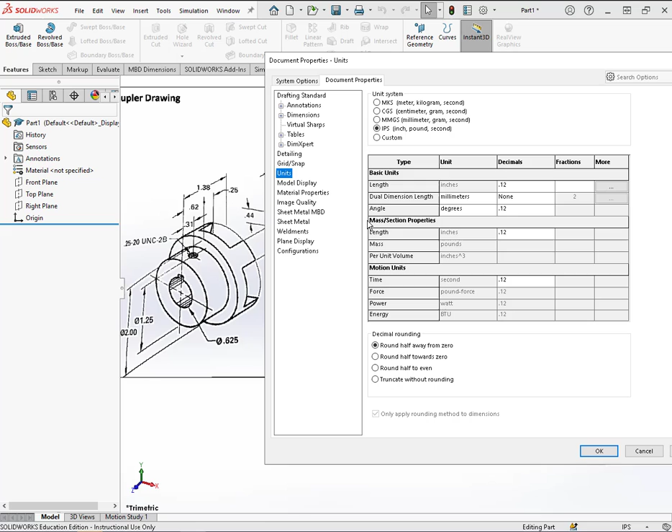So the rule of thumb is whatever tolerance value you hold is how many decimal places that you should have. So we're going to go ahead and change that to 3 decimal places. So inch pound second, and then the number of decimals is going to be 3. So we're going to go ahead and change that. Angle, we'll just leave it. You're probably not going to go lower than that on the angle, and then the mass, we'll leave it as well. So the length, which is a distance dimension, we want 3 decimal place precision. So we're going to hit OK and get out of that. And now we're going to start drawing.

So let's kind of zoom in here. Probably the best part to start on, the easiest part, is the one in the middle here, this middle bracket that goes in between the couplings. And actually, this would be made of rubber, and then the couplings themselves were a steel alloy. So how would we make this? Remember when we talked about design intent, that was our plan that we were going to map out before we go, so we know exactly what steps we need to create. So we're looking at this, we're given diameter, so we know that this is a circular cylinder here in the middle. And then the outer diameter is also circular.

And then we've got these edges that look almost like a gear. So what we're going to do there is just an extrude. We could do just an extrude with this smaller inside diameter, and then create one of these teeth. If we are calling this a gear-like object, we'll create one of these teeth and we'll extrude it, and then we can do a polar array to copy those. So that's probably going to be the easiest thing, rather than try to create all of that geometry in one sketch.

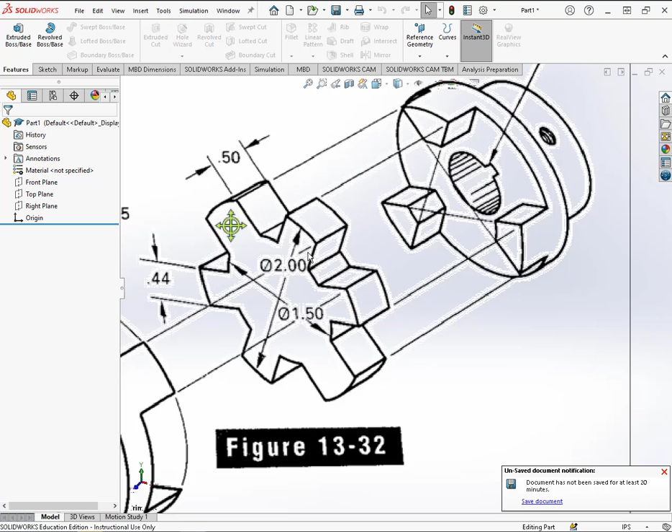So we're going to start on the front view, because if I zoom out a little more and have my front plane facing, that is the way it's going to be facing when we put this assembly together. So we're going to start on the front plane. Again, that's part of our design intent. We want the end product to look as if it was going to be assembled together. So we're going to click on the front plane. We'll go ahead and start a sketch.

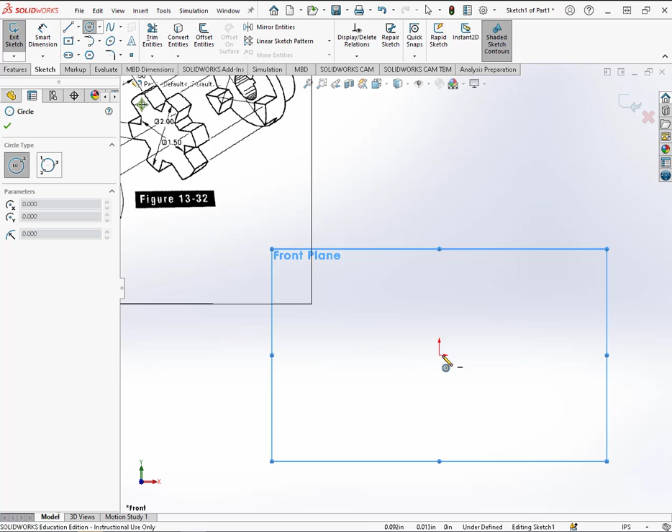And our sketch is going to be, like we said before, we're just going to do this small inside diameter, so that 1.5 diameter, and that's basically just going to be a circle. So we're going to start at the origin, because that's good design intent, and everything is symmetrical and it's going to line up. So we're going to create that, and we're going to put a smart dimension on it of 1.5. All right, and once you have it dimensioned, you can see that your sketch is fully defined.

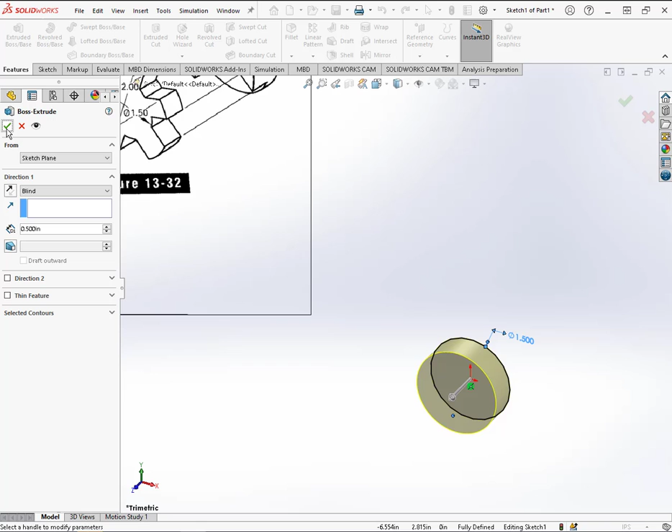We can go ahead and check out the sketch, or we can skip that click and go straight to features and go to extrude. Now, what is my extrude distance? If we look up here, it's going to be 0.5. So we're going to type in 0.5. We don't have to change anything about the end condition because it's already on blind. And we'll check it off. So now we're going to check out of the extrude, and we're going to go ahead and create the teeth parts.

So if we look at this, we're not really given any dimensions except for the width, but we can kind of justify our dimensions based on what we know of this object. So we know that this fits together. There's 3 prongs on this side, 3 prongs on this side. Those 3 prongs are going to fit in the slots here. So if we do 3 into 360, which 360 is how many degrees is in a circle, we're going to divide that by 3 because we have equal pieces. That's 120 degrees apart. So each one of these prongs are 120 degrees.

And then if we look at the other coupling, those will also be 120 degrees apart, but they'll be offset to fit in every other slot. So this one is actually, if we were to draw a quadrant line straight up from the center of that hole, this one would actually split that quadrant. So we can kind of figure out what angle this should be at. And then we also have the distance here. So we have everything that we need to know. Okay? So basically, we're just going to add this geometry and then we'll array it.

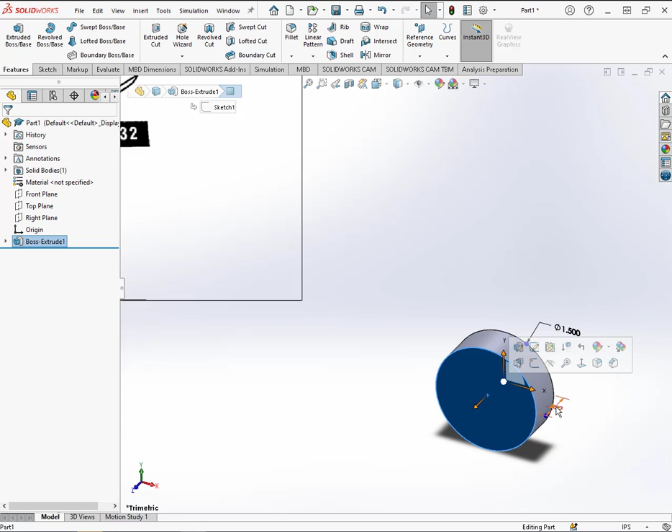So we know it's 0.44, a distance of 0.44. And we also know our angle here, assuming that it's going to be the same. It looks like these are at a diagonal, so it keeps that same angle all the way across. So to create this, we can either start back on the front plane, or we could choose this surface. Either way, it's not going to matter a whole lot. So just choose that front surface, and we're going to choose sketch to create a sketch on that surface.

Now, because this is offset in our assembly, doesn't mean that we can't make this one straight up and down from our origin. Because in our assembly, we can rotate that to match. So for us, we're just going to make a center line straight up, even though in this pictorial, it looks like it's offset by the angle. So our first step, once we're in a sketch, is to go up here and choose center line. And we're going to start on that origin and just make our center line straight up. And we want to make sure that it is vertical. So that yellow constraint that we see, that geometric relation that pops up, tells us that we are indeed at 90 degrees.

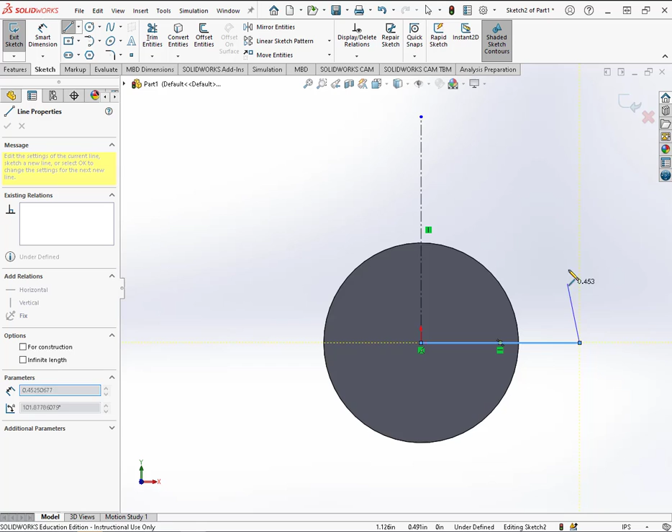So center line, if we look at this again, if you do the down arrow next to the line command, you're going to click on center line. Now, if you accidentally just choose line and don't choose center line, then you can create a line. Let's say I created that line, I can make it for construction if I need to. So we can make any geometry turn into a center line if we need to. I don't really need that right now, so I'm just going to delete it.

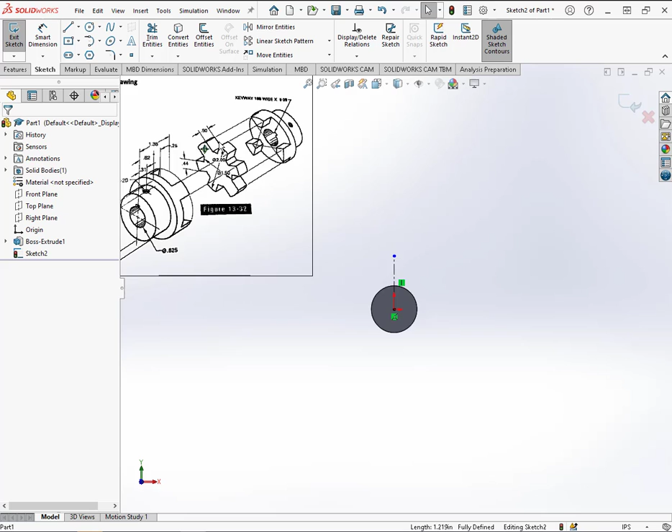This center line, we're not going to put at any certain length, not for now. We'll go back and create some of this other geometry, and then we can figure out what we want to do with it. But for now, just make it straight up and just make sure it's vertical and it's anchored to the origin. So if we look at this, that outside diameter is 2 inches. So our next step would be to create a circle that has a diameter of 2 inches.

So that's what we're going to do, and it's a concentric circle, meaning it shares the same center. So we can start that from the origin and just create it out. Remember, we don't have to type in any distances there at the front end of it, but we do have to go back and put a smart dimension on it.

When you click on the circle to start, see this little orange dot that comes up? That tells you that you're concentric. And you can also see that little symbol out beside my arrow. That tells me I'm right on it as well. And you're going to have this concentric mate pop up too in your sketch. So those 3 things are going to help me know that I'm right on the origin.

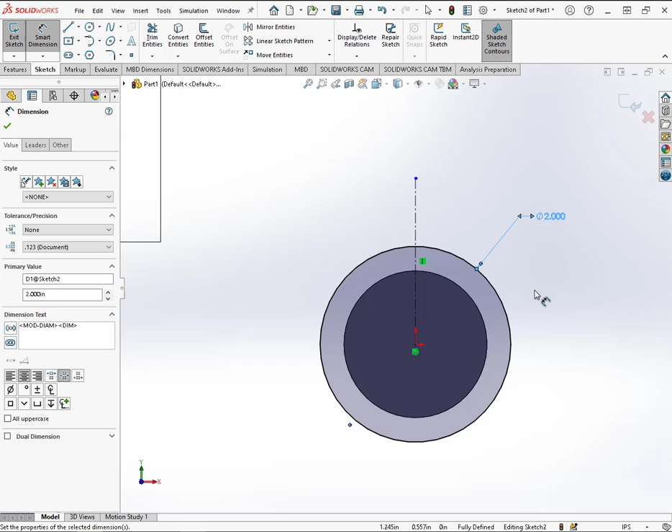So putting on that dimension, it's going to be a 2. And now if we just look back at this object, we know that it is 0.44, and that's going to be centered up around our center line. So we're going to offset 0.22 on each side. So I need to get out of Smart Dimension. 2 or 3 ways I can do that. I can hit Escape, I can come and unselect it up here, or I could right-click and choose Select to get out of the command.

So Offset Entities is here. We're going to click on that offset. We're going to choose our center line, and then we're going to choose bidirectional because we want the same distance on both sides, and that distance is going to be 0.22. And we will add dimensions. Select chain doesn't really matter because we only have one entity anyway. And you should see your lines showing up on either side, and we're going to check that off.

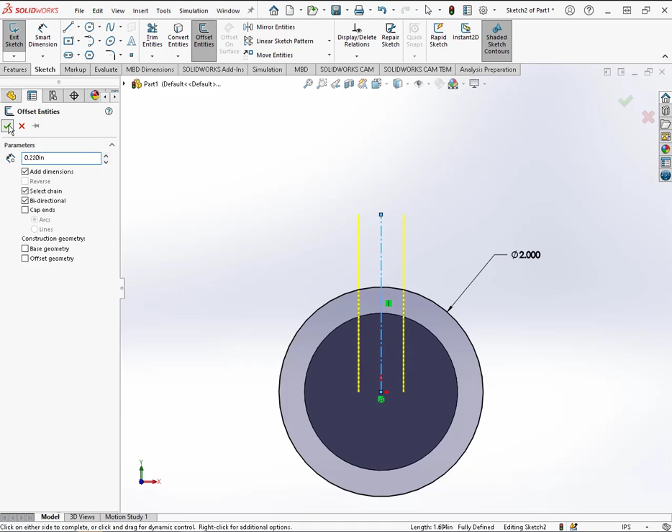So when we check it off, we can tell that it did what it's supposed to do, and we can see that there is a dimension on there that allows us to know that we are correct. So what's showing up here is the geometric constraint that we put on it. It tells you that this line is in relation to your center line because we offset it. And if you just hover over it with your mouse, you can see that it's an offset line, and it tells you which lines are offset.

And then this one was our vertical line that when we created that center line and told it to be straight up from the origin, that just tells us that it is straight up and it's at 90 degrees. So what we're looking at here, we do have all the geometry, but we don't really need this line. We could actually trim the center line right here so it'll come to the edge of the circle. And we can trim out here. We don't need the rest of that circle.

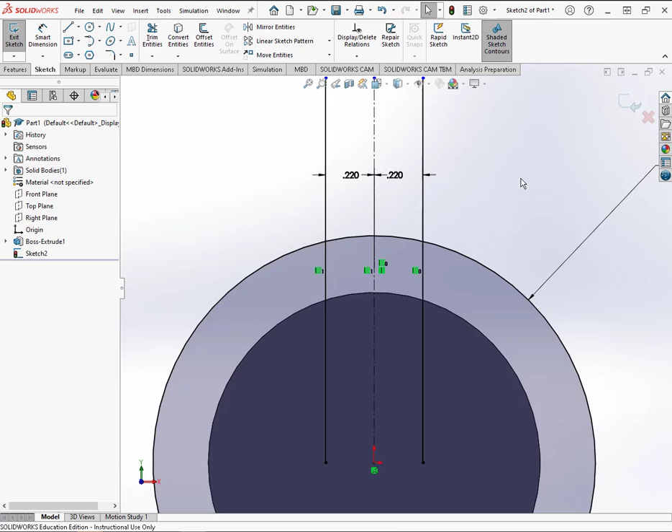So in order to finish this drawing, right now it says we're fully defined, but we really need to trim up. We want a closed loop shape for our sketch. In order to get a closed loop, we still have to make this line. So even though we have geometry already made and it looks like there's a line there, if we rotate, there's not really a line there.

But we can easily bring this edge. If you click on this edge and go to Convert Entities, it's going to convert that edge to our sketch. So now if I go back to normal to, this edge is already in there. Okay, so we can see that we have a closed loop if we come in and trim out where we need to. So the last step for this sketch is going to be trim entities.

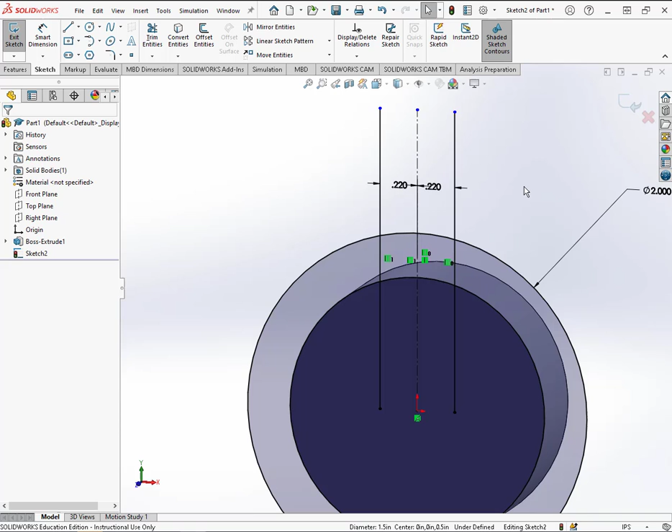Now, SolidWorks has several different trim options. If you're an AutoCAD user and you're coming into SolidWorks, the trim to closest is probably the most similar to AutoCAD, but Power Trim is definitely going to be your best option most of the time when you get used to it. Now, Power Trim, the way it works is it's almost like you're drawing a line. So out here in space, I'm taking my mouse and I'm holding down my left mouse button.

So your main mouse button, and it looks like you're drawing a line. But anything that that line goes through is going to trim. So if I put it through here, it's going to trim, and it's going to trim automatically up to the next entity, and it's going to put a relation. So I know that line is coincident or on top of my circle.

Now we do not want to trim the center line down here, so don't get crazy and just draw a line through everything. We only want to trim those 2 lines on the edges. Don't trim your center line, at least right here, because then we'll break that relation between the origin and our center line. But we can trim the center line up top. That's okay to do. We wouldn't necessarily have to, but we can.

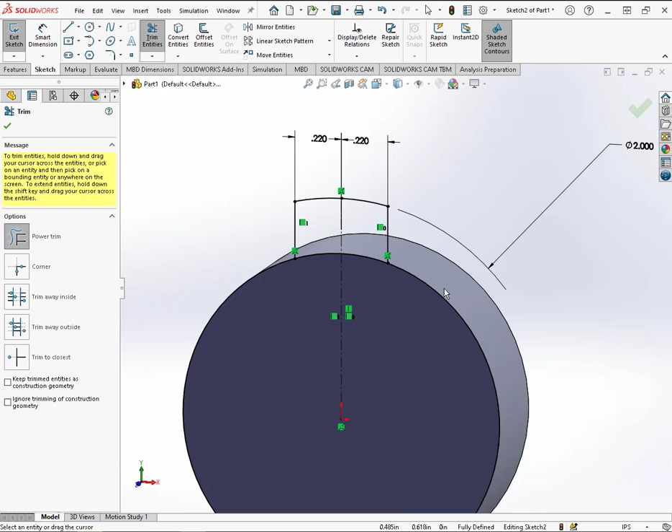And also, since we brought in this whole entire edge, we want to trim the rest of that circle. And when we do that, we now have a closed loop. And you can see that it's highlighted for us to go ahead and extrude that. So I'm going to check off the trim.

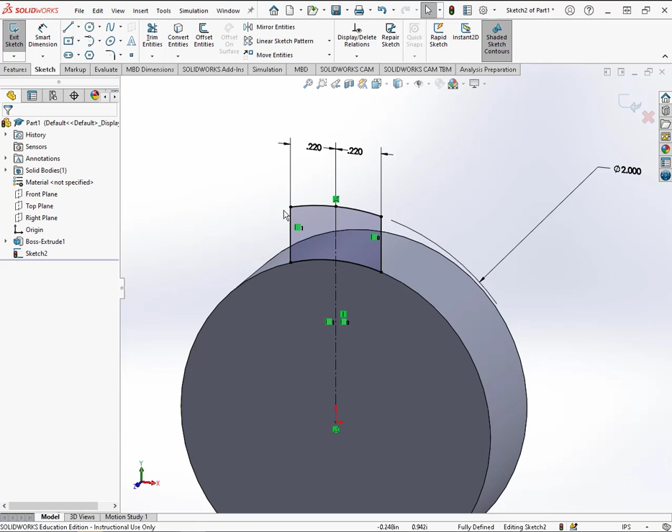So if you have any extra lines, then it's not going to come in as a closed loop, so it's not going to be highlighted. So if you have extra lines other than your center line; the center line doesn't count as part of the geometry. So you need a closed loop where all the corners are coincident and everything is closed in, there's no gaps.

And whenever you have that, you should see fully defined on your sketch. That means we have all the dimensions and all the constraints we need to create this geometry. So even if it's not highlighted, because sometimes it may not be, in this case mine did, but if it doesn't, that's okay too. Let's go ahead and check off the sketch, and I'll show you in the extrude what you can do to help yourself on that. So let's click on extrude.

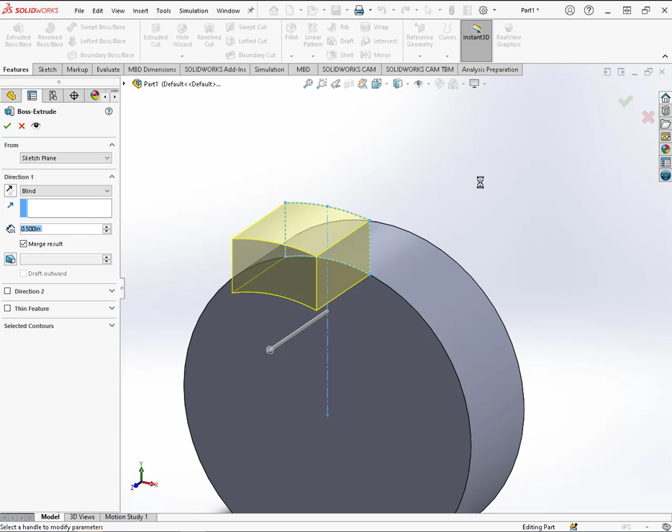And my extrude is going the wrong way. So the first thing that I'm going to do is just tell it to change the direction. So that's that first button beside where it says blind. I'm going to click on that button and it's going to go the opposite direction.

Now, I don't want to just say blind on here, because if I have to change this object, let's say I need to go in and change this depth, I want the depth of my extrude to always line up with the depth of this extrude. So instead of blind as my end condition, I'm going to say up to surface. So click the up to surface, and it's going to allow me to choose the surface.

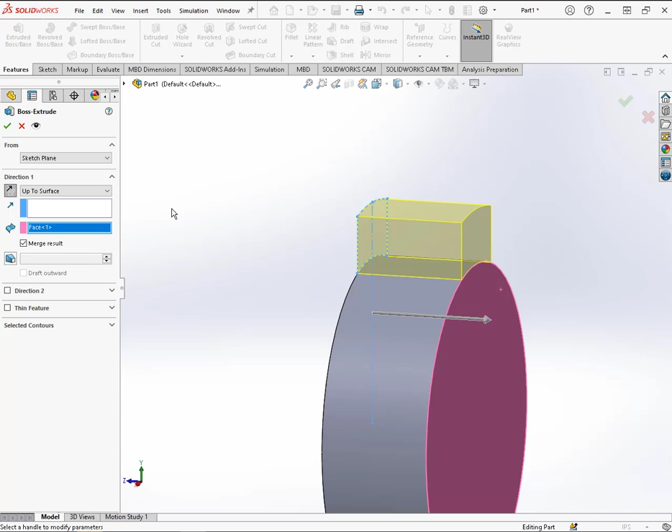So I want to say that this extrude should always go to this back surface. That way, if I do update something, this is going to update automatically with it, and I don't have to go in and change several different things at one time. Okay?

So if yours is doing something that it should not do, let's say that your sketch is not all the way closed in, you can come down here. Sometimes it'll allow you to select the contour. So right now my contour is that whole sketch, which is what it needs to be. So for me, I could just check that off.

But let's say that yours is picking up something different. You can choose the Selected Contours and click inside those contours. So maybe you forgot to make this a center line and you actually made it a regular line. You could click this side and just choose the contours instead of the whole thing. So then I'm going to check that off, and we now have that first tooth. Okay?

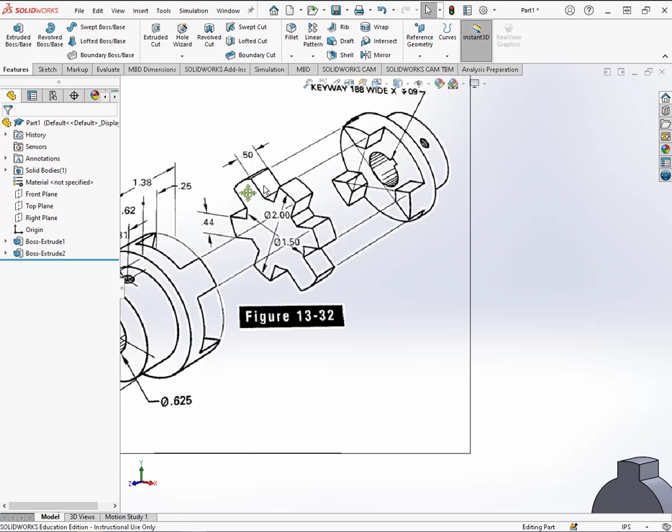So I know some of you have questions, so we'll pause right here and I'll come around and answer your questions. So now all we have to do is make an array of this object, or that last feature that we created. So how many spaces are there here? How many of these entities? 1, 2, 3, 4, 5, 6. We knew that because we have 3 on this side and 3 on this side. So we knew that those would have to fit in the spaces.

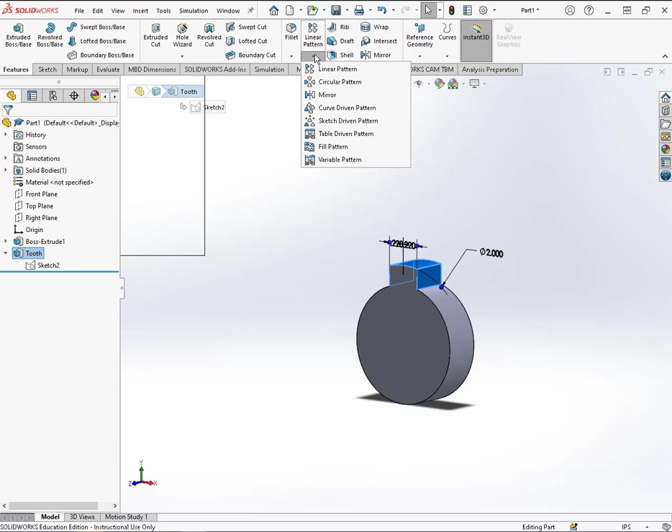So what we're going to do is just choose that Boss Extrude Feature 2 that we created. And we could even rename this just so we don't get confused. We could rename this Tooth, just so it helps us to remember that's what it is. So we're going to click on just that extrude, and we can come up here to pattern. Now linear pattern is actually showing, but we want to choose the circular pattern. So we're going to click on circular pattern.

Now the direction, we don't have an axis showing up just yet, but the direction comes from the axis. So we need to come up here with the eyeball and choose temporary axes. So whenever we click on this button, it allows us to view that temporary axis. And you'll have a temporary axis on anything that's symmetrical or cylindrical. So basically like a hole or a cylinder, it'll put an axis there for us because it'll line it up with the center of there.

So this direction 1, we're going to click on the axis, and then we can see the preview starting to show up. We are going to have 6 instances, so I don't have to change that, and we do want to go 360 degrees. So we're good. Since we chose tooth already, it knew what to copy. Had we not chosen that, we would have had to choose it from our feature tree. And the way we get our feature tree to show up when we're in a command is just to go over here and expand it out by clicking the arrow, and then you can choose it from here as well.

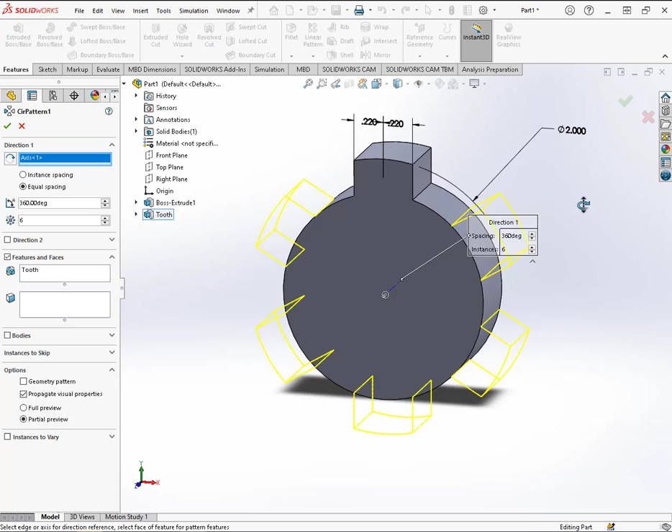So everything looks good. It looks like it's going to copy well. We'll just check that off. And now we have our part.

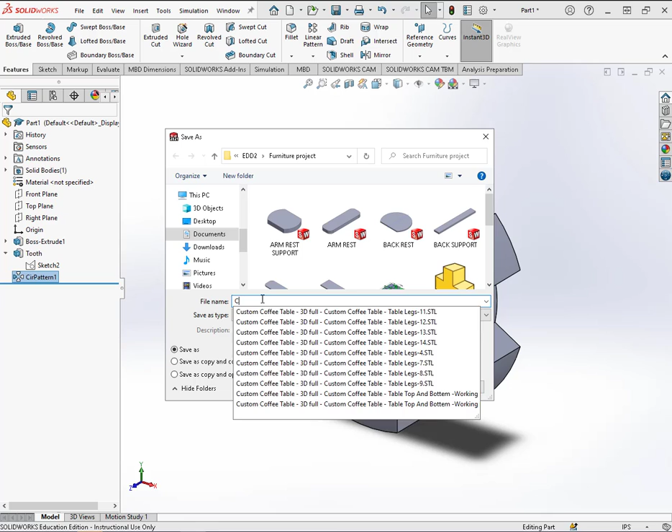Quickly here, we're going to go ahead and do a save. Let's do a file, save as, and we're going to save this as coupler part 1. Now we could go in and see what it was actually called to see if there was another name to it, or we could come up with a name like spacer or end piece for the ends, but just do coupler part 1. We'll hit save, and you may have to go and find where you want to save it at. So you may have to scroll to your folder that you're saving it in.

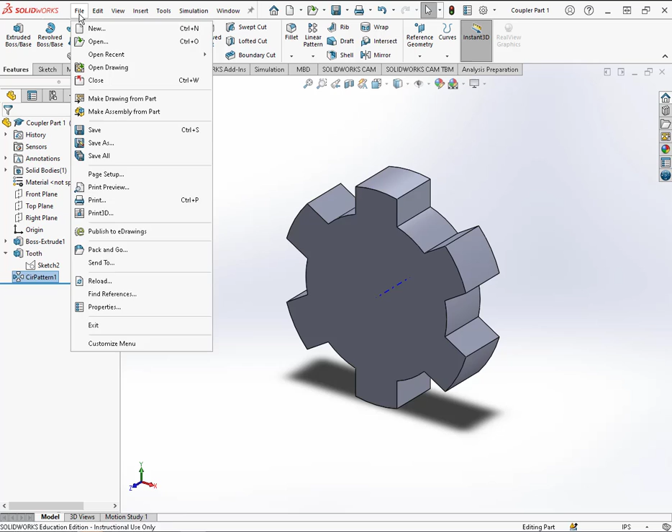So that was the first part. Now we need to go to File, New, and we're going to create another part. So we're going to hit OK.

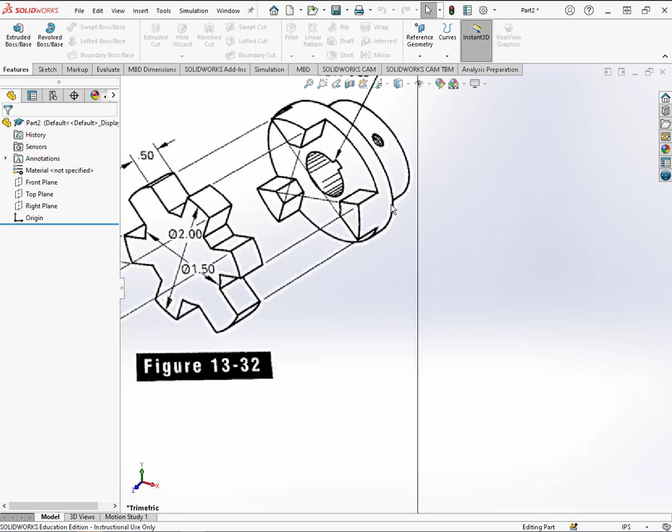Now on this part, I don't have my drawing on here, so I'm going to show you how you can get that. All you have to do if you have a newer Windows model, which you have to run SolidWorks, you can bring up the snipping tool and just snip a picture of it and come up here and say edit, copy, just minimize that, come back into SolidWorks and just paste it right in there. So we go to edit, paste, and it allows you to paste a picture, and then you don't have to scroll back and forth. But at the end, we want to delete that picture. We don't want it to be a part of our drawing, so we want to delete it before we do anything else. So we'll draw this back piece, this end piece.

So what do we know about it? We have very little dimensions just on this piece, but we know just from the spacer part that we just did that that inside diameter between here and here is going to be 1.5. We know the outside diameter is 2. And then the other parts, because these are basically symmetrical parts, they're the same on both ends. So actually we really only have to draw one of these. We have 3 parts, but since these are the same, all we have to do is draw one of them and insert 2 of the same part into the assembly.

So let's look at these dimensions. We've got 1.38 for the entire depth here, 0.62 back to where this lip starts. From there, that thickness is 0.25, to the center of the hole is 0.31.

Yes, they should be the exact same. Now, it doesn't look like it because it's rotated a little bit. See how this is rotated to offset from where we are here. So it looks like in an assembly, you want to explode it so it's lined up as if you were going to assemble it. So this one is just straight upright, and then here that's rotated. So it looks like 2 different parts, but it's actually the same.

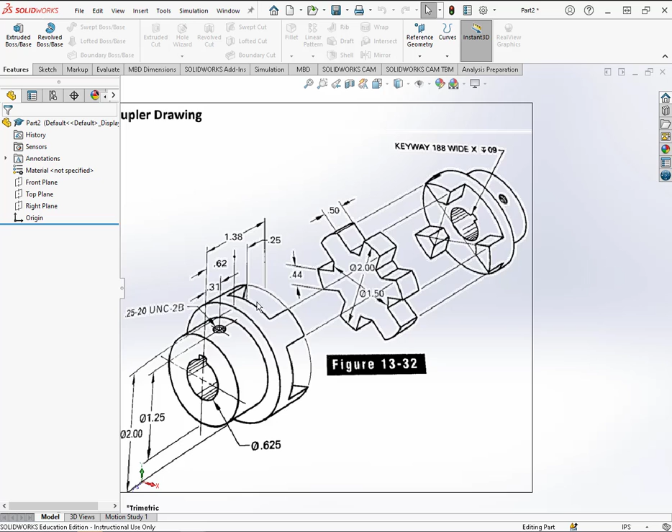So I'm going to show you how to do a revolve. Because this is a cylindrical object, we can do this boss here and up to this point right here, up to this 0.25 dimension edge. We can do all of that with a revolve. Okay? So this time we're going to start out on our right plane because we're doing a revolve.

And in a revolve, we really only need half of the profile. And I'll show you what I'm talking about. Let's create a sketch. And when I say half of the profile, we're just going to draw from the center line up, as if maybe you were doing a section view, if you were drawing this in AutoCAD.

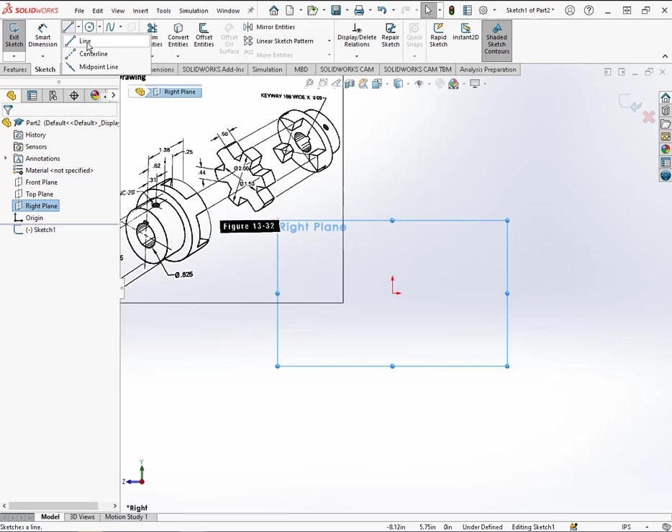So we are going to start out with a line right here, and we'll just make that line straight up from the origin. No certain amount. It's probably not going to be that long, but I went to the line command, so I'm clicking on line, and I clicked on the origin to make sure I'm coincident with the origin, and you also want to make sure it's a vertical line.

Okay? If something happens, let's say that you didn't make that a vertical line, we could click on it, and over here in the line properties, we could tell it to be vertical. So you don't have to delete your object just because it didn't get to be vertical. Let's just do a normal line for now, and we're going to trim.

So the profile here, if we go straight up, over, straight up again, and over, and then come down to the center, we can get our profile. So again, to make this line straight, we're just going to click on it, and you can click on vertical over here. If it already has vertical, it's going to show up with the relation.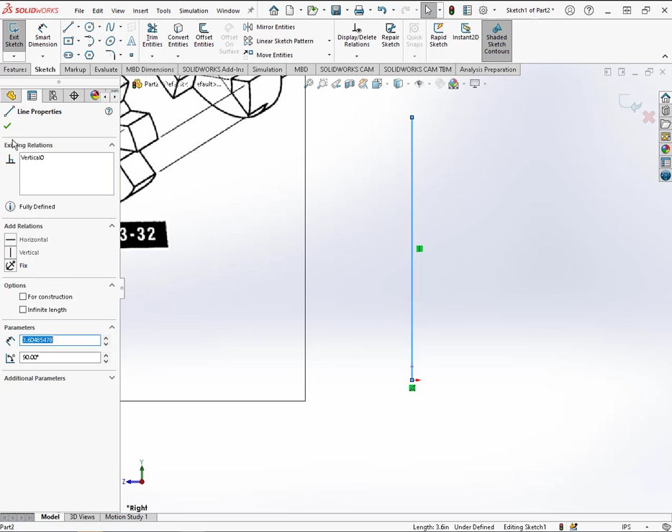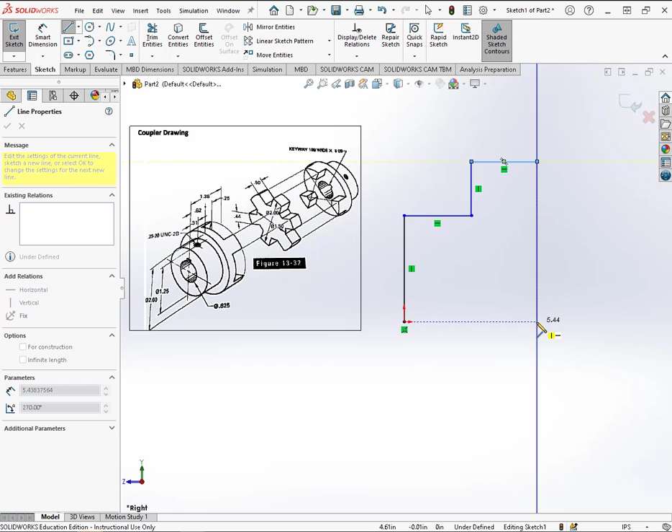All right, so we're going to go back to the line, and we're pretty much just sketching this profile. So I'm going to just make it proportional. You don't want to make it so that it's not proportional with what we need. So the object is going to look something like this. We still have to go back and put dimensions, but I just made a line straight up, over, a smaller line straight up, and come down, and I made sure that this was in line with my origin.

If it happens not to be in line with my origin, then we can do things to make it line up. We can click on the line and hold down Shift or Control and click on the origin and tell those to be in line with one another. Since mine are in line, there's nothing that it's suggesting we do. So once we have our profile, we can go back and put some of these dimensions in.

Now I want you to notice we have a hole in the center. So when we have a hole in the center, then we can go ahead and implement that hole in with our profile. What that means is we just put a little bit of space in between the center of the object and where the actual visible line would come in.

So what we're going to do here, we're going to change this bottom line into a construction line. So remember, I told you you could change any of those lines to a center line just by choosing construction. So select that bottom line, tell it to be for construction, and go ahead and check off of that line. So now I have a center line.

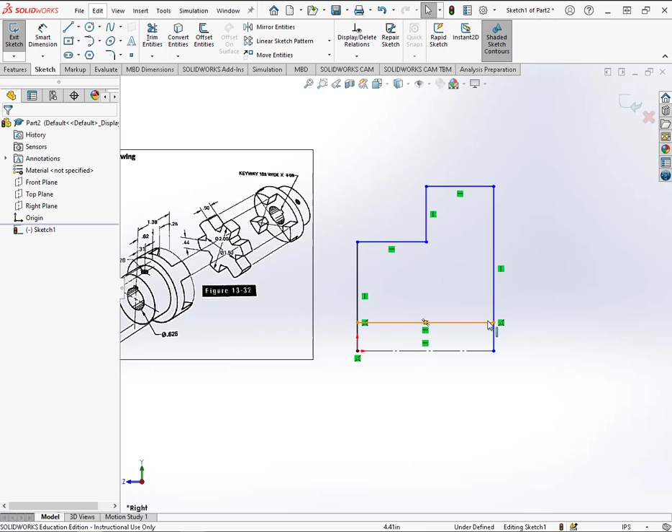So the next step would be to choose the line command again, and we're going to create another line, and this is going to be our visible line across the bottom. So we're actually going to trim out right here and trim out right here. And what might happen if we trim here, we may lose our connection to the origin. We will lose it because we're going to trim, and I'm going to show you how to get that back by adding relation.

So once you're at this point where this is a center line and this is a regular line, you can go up to Trim Entities, and we trim both of those lines. So we still have a closed-in object. Notice we're still very underdefined. It should stay underdefined because we have no dimensions on here whatsoever. All we have is a few relations on here. But after you trim, just check that off. We're going to start filling in the dimensions and adding geometric relations that we need.

So the first thing, we want to be back in line with our origin. So in order to be back in line with the origin, what we're going to do is click on that line, hold down Control or Shift, either one will do the trick. And then over here in the Properties button, it tells us, hey, you can do all of these things with those two entities. And it shows the entities that we selected. So with the line and the point that we selected, we're going to tell those to be coincident. That just means that they're lined up and connected to one another. And we're going to hit the check mark.

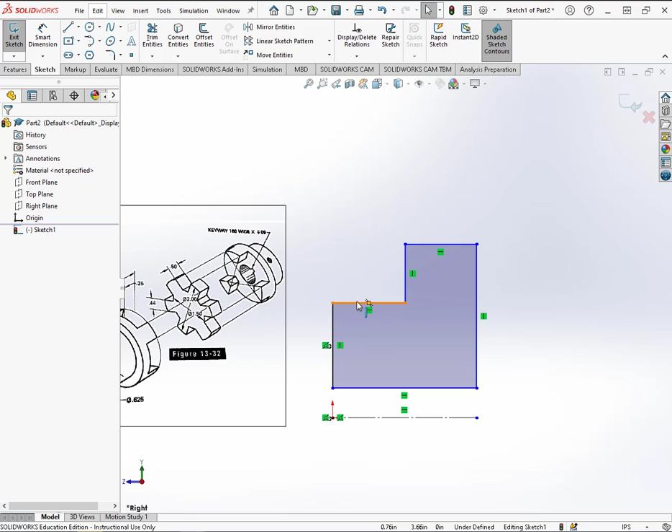So this line is the line that's 0.62, so I can choose Smart Dimension. I can click on that line and bring that up. That's 0.62. And then I can choose this line and tell that line to be 0.25. Okay, and slowly we're starting to get fully defined lines, but we're still underdefined as far as the entire sketch. So we have the horizontal dimensions we need. We still need the vertical dimensions.

So those dimensions are actually these diameter dimensions that we're going to bring in. And we're going to need 3 of them. We won't need the 1.5 just yet, but we will need this 1.25, we'll need the 2, and we'll need the 0.625 diameter for the hole. So let's do the outside diameter first. That's a 2-inch diameter. Actually, let's start with the inside diameter, because if we work from the inside out, it's less likely that it's going to change our geometry where we'll have to drag it to be proportional again.

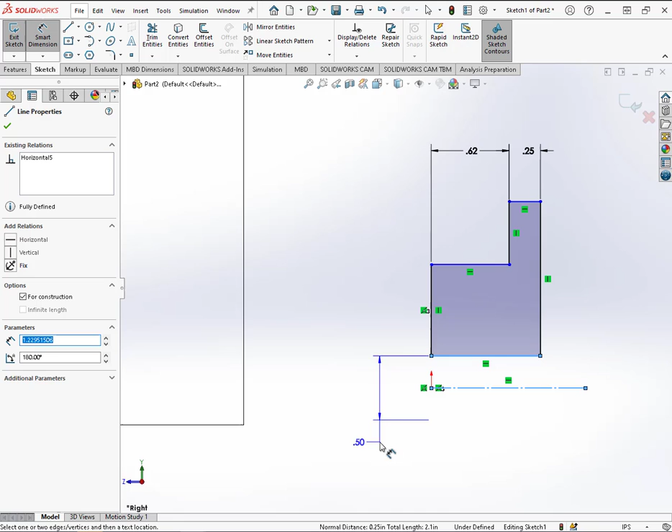So go to Smart Dimension, and we're going to choose this bottom line. Then we're going to choose the center line. And then we're going to go down below the center line. See how it makes a diameter dimension for us? So I'm going to click, and it's going to allow me to put that 0.625. And it knows that it's a revolve, it knows that that should be a diameter, and it allows me to do that. So the way I did that again was click on this line first, click on my center line, and then click below for my last click, and it lets me set that as a diameter dimension.

The next dimension is that 1.25, and then we'll do the 2. So for the 1.25, we're going to click on this line. We're going to click on the center line, and we'll click below the center line, and then type in 1.25.

And the last one, the 2-inch, is this outermost diameter. Click on the center line and click below the center line, and that gives us 2.

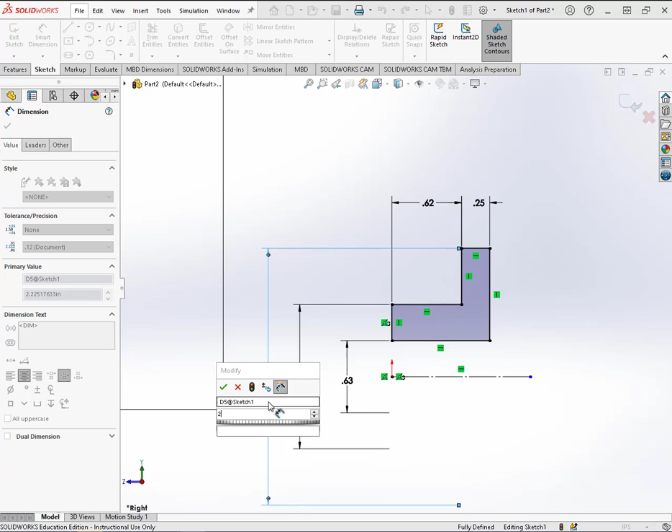So when we have all of those dimensions in there, they don't have to be exactly lined up, but sometimes it's helpful whenever you are importing your dimensions into your working drawings. If they are kind of centered and lined up, it imports them where you have them according to your sketch or your part profile. So it does help to keep those close and not dangling way off the edge of the screen or anything like that. And also, if you have to go back in here and change anything, it's helpful to be readable and clear.

So once we're at this point, we can check out of our sketch, or like I said, we can skip that step and go over here to features, and now we'll choose revolve feature. So far we've only done an extrude, but now we can do a revolve. It automatically picks up that we want to use the center line as our axis of revolution. Because we made that a center line, it picks it up as our axis.

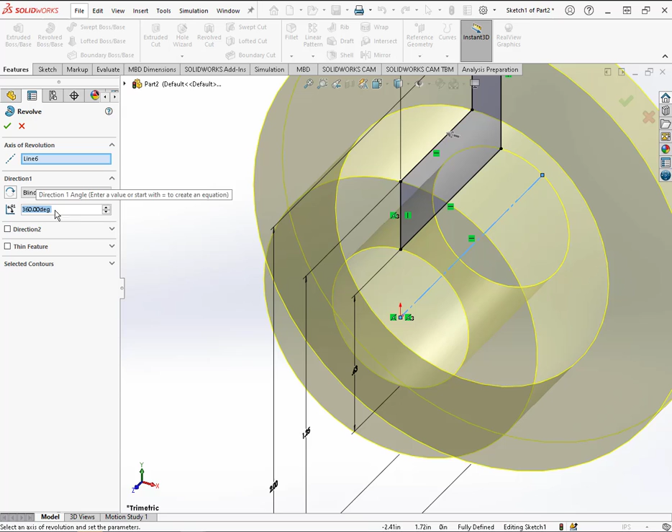It is assuming that we want to go a full 360 degrees, and we do. So our preview looks good, and we're going to check that off. And now we have the cylinder, the main part of that cylinder. Okay?

So unlike this part where we just drew the inside diameter first, now we're working from the outside in. So when we actually do the sketch for this tooth, we're going to have to work from the outside diameter to the inside, which is no big deal. We can do that.

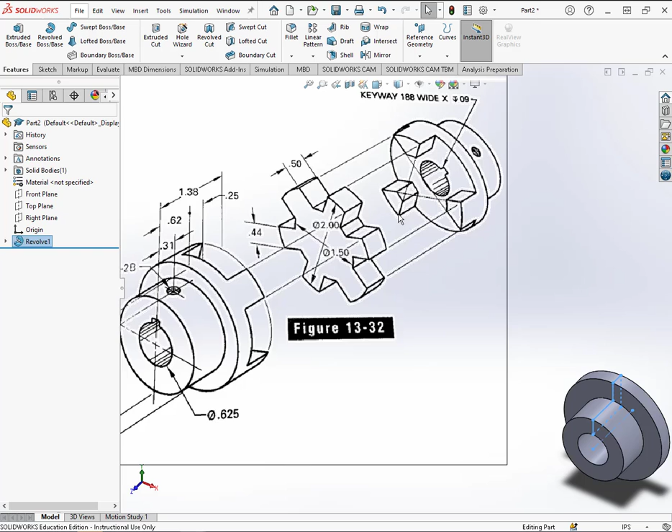But we're going to have to do some construction geometry in our sketch to figure out what this angle should be. We know that it is a congruent angle because it's lining up with the other side. We just have to make sure that we're keeping that straight, and we can do that with construction geometry. So the next thing that we would want to do, we could go ahead and put our keyway in there and put that hole in, but let's tackle those teeth.

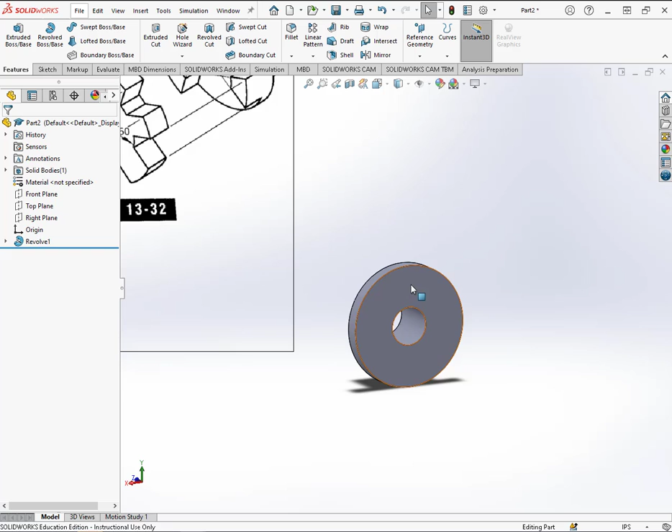So I'm just rotating. I'm holding my middle mouse button down and rotating. And I'm going to choose this back surface as my sketch plane. So when I do that, I'm just going to click on that surface. And I can tell that it's a surface because I see that little square come up. If I'm at the edge, you'll see a line come up. So that's the difference between selecting the edge and the surface. It's telling you what you're selecting. So I'm going to select that surface and choose sketch.

And if you remember, the distance there was 0.44 and that inside diameter was 1.5. So what we're going to do, again, we're just going to go straight up from the origin because in the assembly we can rotate it how we need to rotate it. So that's not going to be a problem for us. We're going to keep our sketches simple and work off of that origin.

So we're going to go back to center line. We're going to click on the origin and go up and just make sure. Right now you can see that I have two constraints showing up. I have a coincident and I have the vertical line. So I'm going to click on there. And once I do that, I can come in and I'm going to convert. I'll click on this edge. I'll convert it.

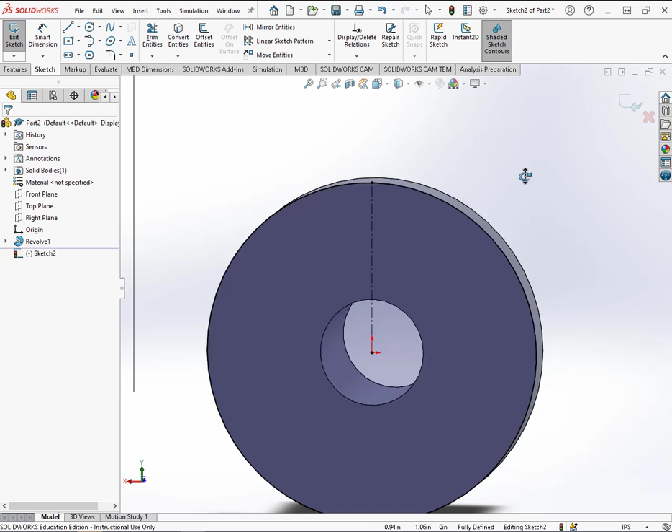So it's highlighted because now I have a closed loop. But we're still not done. We still have more to go there. The next thing that we can do is that inside diameter. We know that that's going to be 1.5. So we can create a circle from this origin, 1.5. And I'm just going to put a smart dimension on it.

Okay. And so in order to make that tooth, I'm going to have to come down here and make these lines. So remember, we can offset that 0.44. And we're going to have to go back in. We made the other part straight down, but when we find this angle on here, I'm going to show you, I deliberately made the other one straight down, but I'm going to show you how we can modify a part in our assembly based on the geometry of another part.

So right now on this one, we are going to make it at an angle like we're supposed to, and then we're going to update our other part in the assembly so I can show you how to edit a part through the assembly. So I don't know if you caught on to that, but that was intentional. So now we're going to have to figure out what that angle is, but we can still offset that 0.44 because we're going to need that as a construction dimension anyway. So we're going to go ahead and click on that center line.

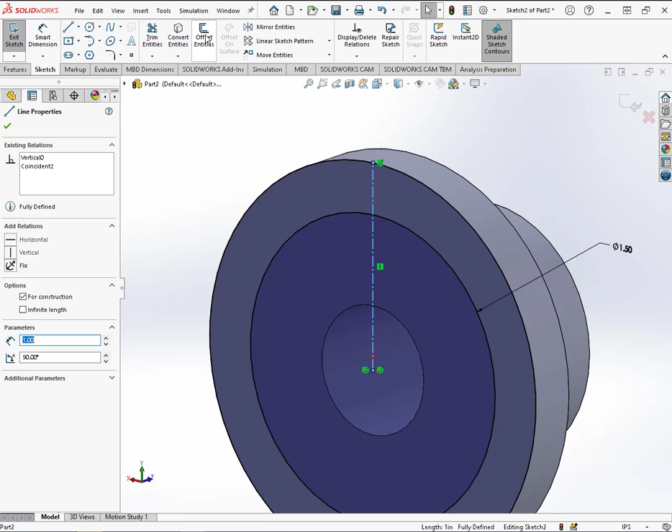We'll go to offset. Now the whole distance is 0.44, but we're going to offset 0.22 because that's half, because we're coming from the center. And bidirectional should be checked. Go ahead and add dimensions so it'll be fully defined. And once we do that, we'll hit the check mark, so we'll hit OK. And we'll check that off.

All right. Now, what we're going to do here is, we could do two different things. We could make this for construction, or we could come in here and make a point. If I click on this point, I can make a point right here at this intersection. And I can see that that's going to be an intersection because I have a different kind of icon coming up. Either way is fine. If you leave it as a line, you might actually see it a little bit better when we do a radial pattern for this. We're going to actually do a sketch pattern.

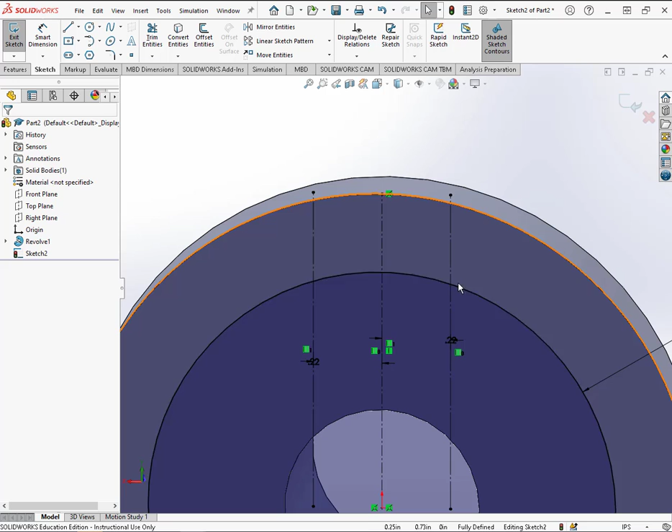So we're going to just leave it as a line, and I'm going to click on this line and tell it to be construction, and then click on this line and tell it also to be for construction. Because really all I need is this point and this point where it's an intersection. Because remember, our other lines aren't going to go straight down. It's going to be at an angle. We don't know quite what that angle is just yet. We're creating our geometry. This is one way to do it. We could actually do it a couple other ways.

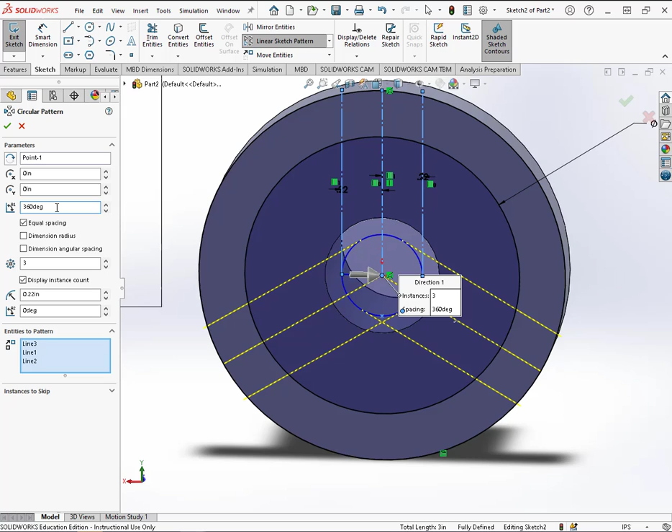But right now what we want to do, we're going to click on this line. We're going to hold down Control or Shift, and we'll just select all three of those construction lines. Then we're going to come up here and go to Circular Sketch Pattern. And it's picking the origin as our sketch pattern, which is what we want. So this Point-1 right here is the origin. That's what we want, but we do not want 4 entities. We only want 3. So I'm going to choose 3 right here. I'm going to tell it to go angle of 360 degrees. So I'm good there, and I'm going to hit the check mark.

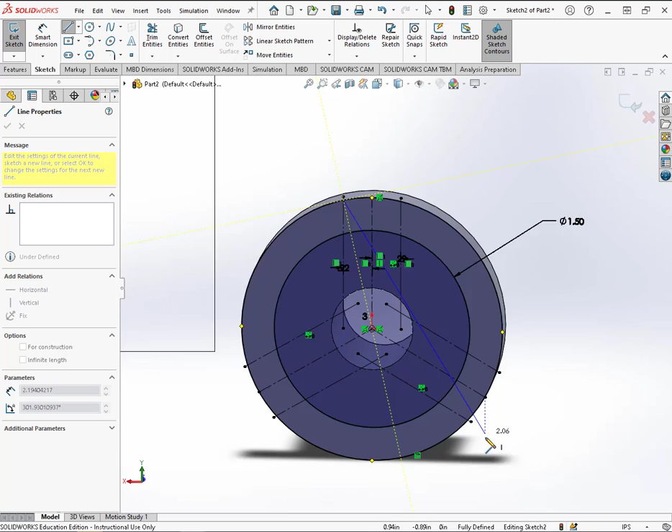Now the reason why I wanted that is because now I have all of those intersections, and I can get my angle, because all I have to do now is go from line, from this intersection here, all the way down to this intersection. Okay? And that's going to give me the angle that I need for my geometry. Remember that tooth was coming in at an angle?

So I'm going to do that on all of these sides, but make sure you're at the intersection on both of these. So we don't want to do the end point. We want to do the intersection where it intersects the circle and that construction line. So when you're dangling over it, and when you're creating your line, this little icon is going to come up, and you're going to know that's the intersection.

Now, let's say that you accidentally didn't get the intersection, you can click on the end point of that line, and you can hold down Control and click on the center line, and you can click on the circle, and it will allow you to put an intersection relation. So it knows that all 3 of those points should be intersected. So if it happens not to have this icon, then that's what we need to do.

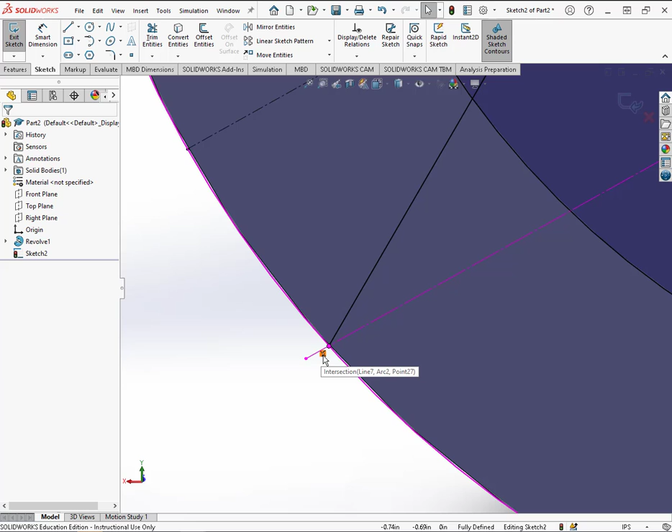So again, to do that, you want to click on the end point of your line, hold down Control or Shift, either one will do, and choose the center line there, or the construction line, and then choose the outside circle. And we have all three of those entities selected, and then we can choose intersection, and it will put it on there for us.

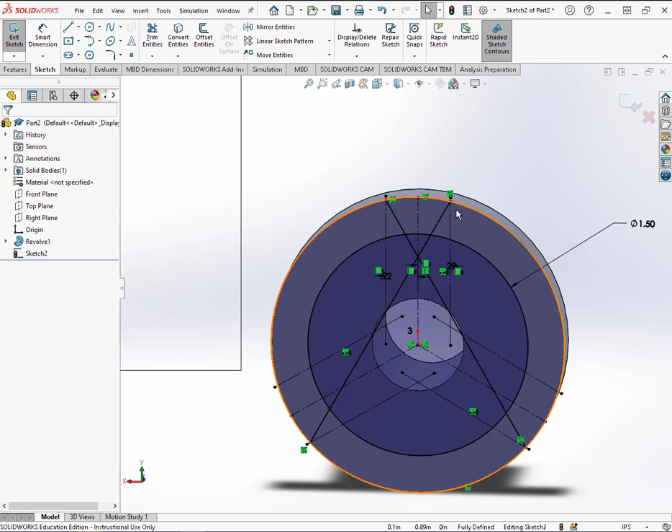So really, we could go around and make all of these and just make the whole profile in our sketch, but we don't necessarily want to do that, because if we come in and end up having to change one of these, we're going to have to change all of them. So what we're going to do is just make one of them in the sketch and actually extrude it, just the one, and then make the radial pattern like we did before.

So give me just a few seconds, guys, and I'll come around and help everybody. Let's get through this sketch, and I know some of you aren't with me, but we'll figure it out.

So I have these parts. What I'm going to do, and the reason why I'm doing this, I'm going to make both of these for construction. It would be very simple to just think, oh, let's trim these. I don't want to trim them, because if I trim them, then it's no longer connected down here and I'll lose my angle. So I don't want to do that. I just want to make that for construction.

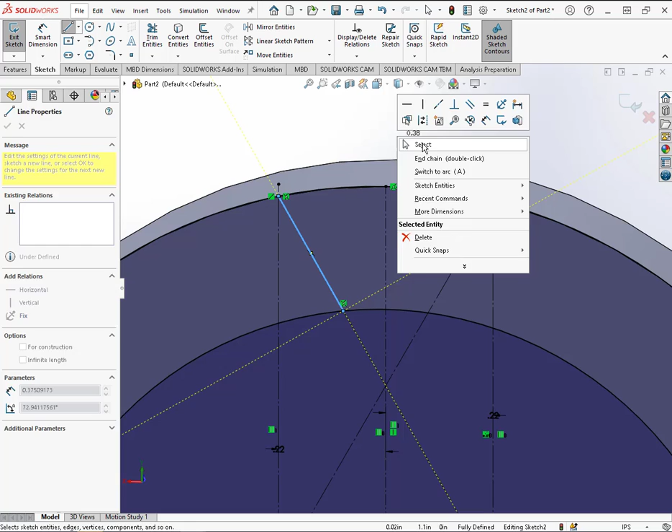And now I'm going to go back over. I don't have to make this again, because that's already a solid line. It's not a construction line. Also, this circle here is not for construction. It's an actual line too. But I'm just going to take a regular line and go from that same point to this intersection here where it intersects that lower circle. And I'm going to do the same thing on the other side. So I'm going to go from that same intersection to the intersection here.

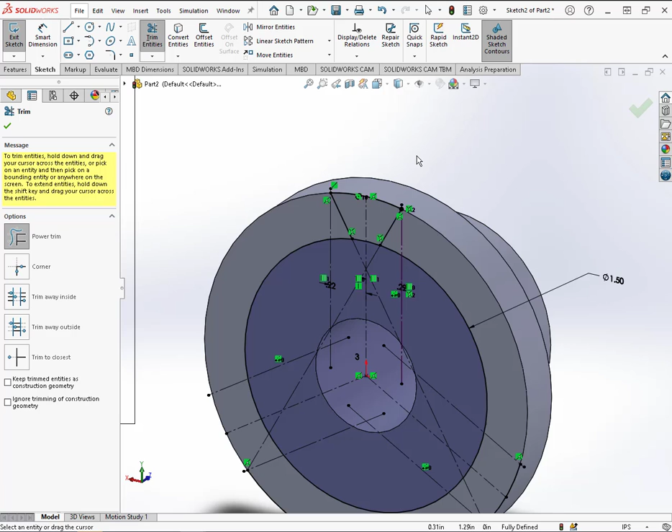So now if I have my profile, the only thing I have to trim is where the circles are. So my last step is to trim the circles. I just want to trim the outside areas of it. So I definitely want to trim, like right here I wanted to trim. I want to trim right here. The rest I can just keep, because I don't want my geometry to lose its relations. So down here again on this one, I'm just going to trim what I don't need on that part.

Now it's still showing up that this is my closed loop, but if I wanted to be perfect on this sketch, I would tell this just to be for construction, and then any of the rest of this arc down here that I didn't trim, I would tell it to be for construction too. So I think that's my edge. It is. So I believe I've got the rest of that arc. So anything that's not actually my profile, I want it to be for construction, because then I have no doubts about what my profile is, and plus it's a closed loop.

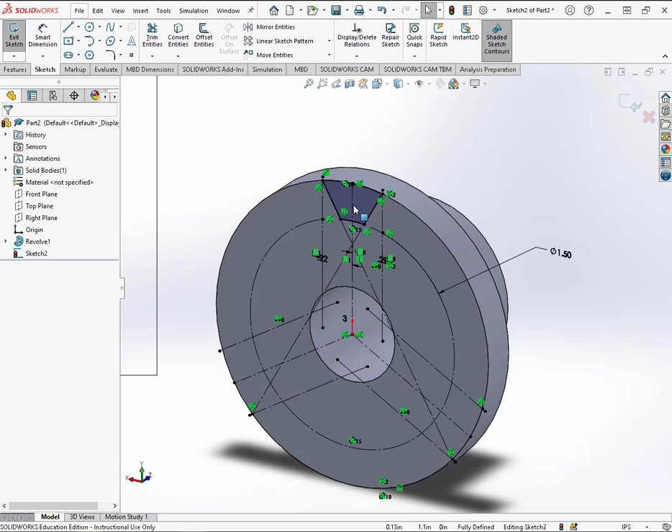So we did all of that just to make sure that we have this little profile here. So that was a pretty complex sketch, but now that we're all on the same page, we can check out of our sketch. Now when you check out of the sketch, if your sketch is not selected at all, what happens when you go to extrude is it asks you, do you want to start a new extrude or do you want to use an existing sketch?

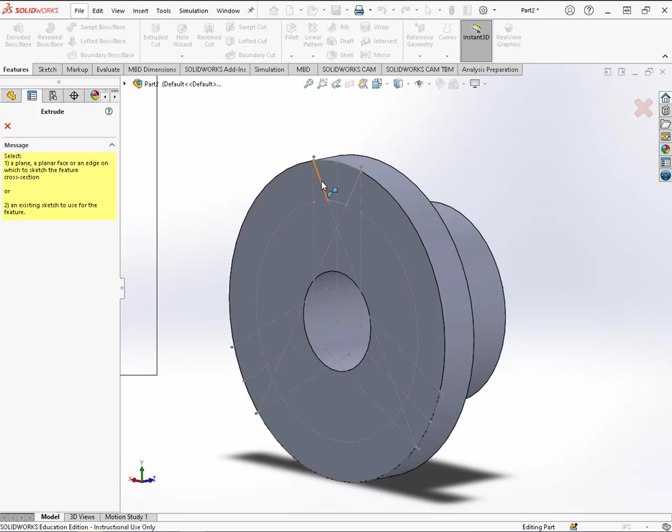So this is where people get confused, because they see this yellow and they start worrying that they're doing something wrong. But all it's asking is, you need to select something. So if you select the line of an existing sketch, then it understands that you want to use that sketch. You could also expand out your feature tree and click on the sketch here.

So we need to know what that distance was, and I forgot off the top of my head what it was, so I'm going to toggle back over here. That distance, the whole thing is 1.38. So if we look at that, that's 1 3/8, minus the 0.625, basically 0.625, but it says 0.62, and then 0.25. So if we do the math on that, we need to know just this distance here. So we're going to have to figure that out, and I get 0.51 as that distance.

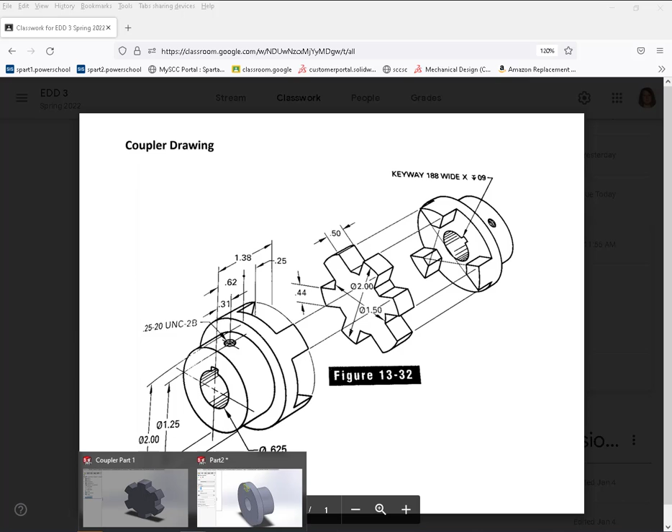So the distance from here to where the little teeth meet the geometry is going to be 0.51. So we're going to come back to SOLIDWORKS, and we're just going to type in 0.51 for our extrude distance. It would be 0.5, but since that 0.62 is rounded off, it ends up being 0.51.

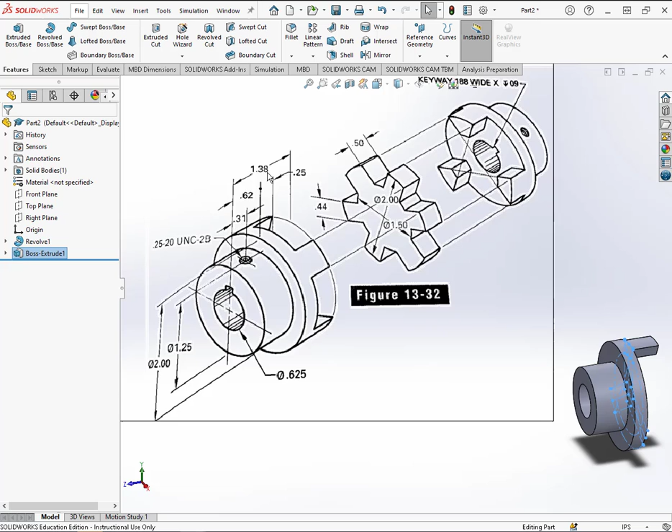And we'll check that off. Yep. And so we can double check ourselves just to make sure, because in this picture it looks like it's longer than what it should be, but if we double check ourselves, we're seeing that this is 0.62 from here to this ledge plus a 0.25 and then subtracting 0.38. So it is going to look longer than what it is depicted in the pictorial there.

So now we have our geometry, and it's Boss Extrude in here. Again, we could double click on that and change the name of it to tooth, or I'll just put angled tooth. That's going to help us later when we try to find some of our geometry to change it. Because remember, the other one we made straight down. So when we do the assembly, I'm going to show you how to fix that based on what we did here, but we're just going to copy this geometry instead of having to recreate all of that sketch. So now we've got the angled tooth.

We need to actually create a circular pattern for it. So we're going to come back up here. We'll go to circular pattern. Remember, our direction is going to be the axis. So we're going to come back up here to the hide show and choose temporary axes, so it comes up so we can click on that center line.

And we're only going to have 3 instances, so we're going to type in 3, and it wants us to select the feature. Last time we selected it before we went into the feature command. This time we didn't, so we have to come in here. I expanded out the feature tree or the design tree, and I'm going to click on angled tooth, and it picks it up, and I'm going to check that off. So now I have this geometry that I need.

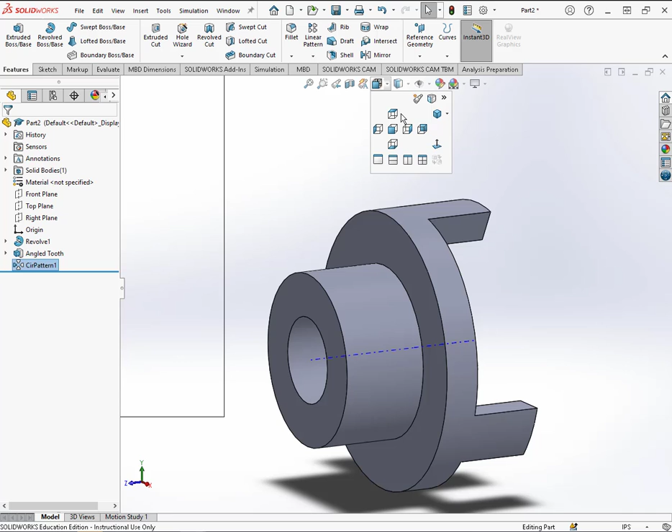And if I want to do like a zoom isometric, I can. And that's what it's going to look like. Now again, it's rotated in this pictorial view, but we can rotate it as we need to in the assembly. So we're not going to worry about that too much.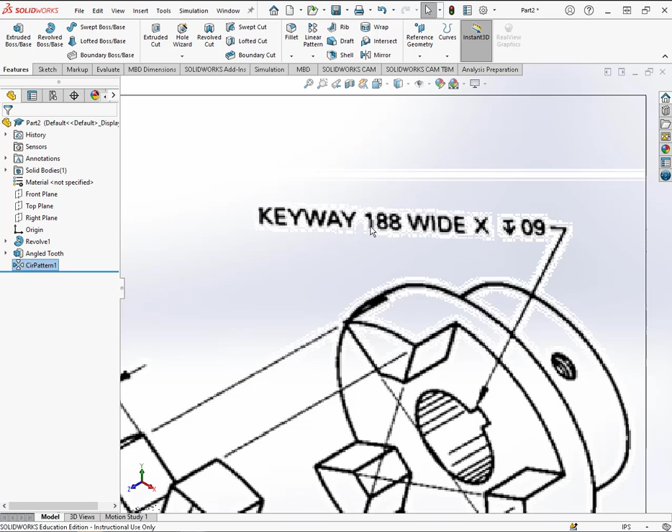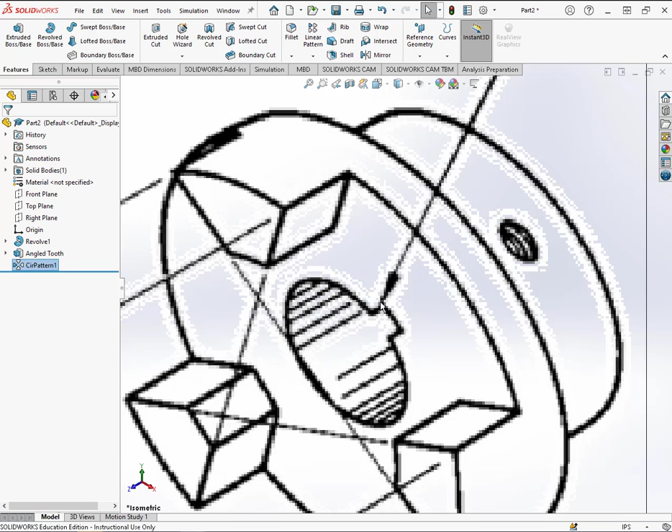Alright, so the last thing we have to do is put our keyway in and put this hole for our set screw. So the next thing we want to go ahead and do is the keyway. If we look at this keyway, it says .188 wide by .09 deep, so that is a typo, I'm afraid. We're gonna do a 1/4 inch keyway, so it's gonna be 1/4 inch across here, and then it's gonna be half of the 1/4 inch here. So half of a 1/4 inch is 1/8 of an inch, so it's gonna be 1/8 of an inch tall and 1/4 inch wide. I'll fix that typo, but for right now, that's what we're gonna do.

So our keyway is gonna go here on this front surface. We're going to click on that surface and create a sketch. And just like we did with the last sketch, we're going to start out with a center line from the origin just up to the smaller circle here. So we've made a center line from the origin to this smaller circle. We're going to offset on either side.

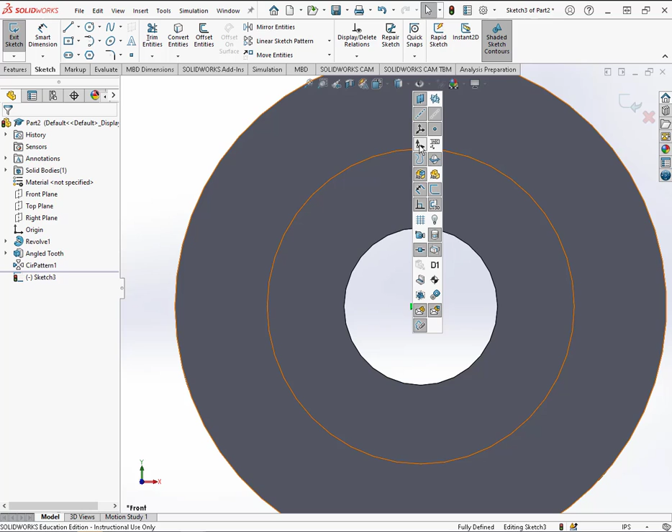You don't have what? Okay, look at your monitor where my mouse is. Right here where it has hide, that little eyeball, come in here and choose View Origins. Did it come up? Okay, so you're going to make a center line from that origin to the top of this object. Really, we only need part of it, but we'll just anchor it to the top just to do it.

Then we're going to go to Offset Entities. We're going to click on that center line, and we're going to offset it 0.125 on either side because that's half of the 1/4 inch. So 0.125. And then we'll go ahead. That looks good. We're going to check that off. And then we're going to offset up 0.125.

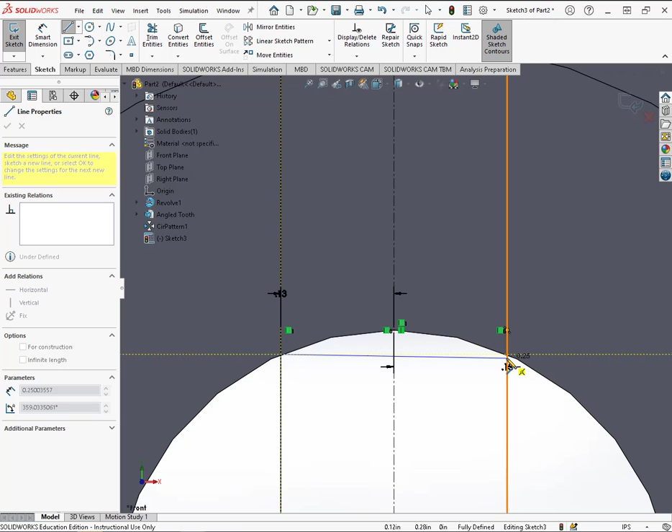Okay? And where we offset up from, we're going to put just a line between this intersection where the offset line that we just made intersects the circle to this intersection. So make sure you're getting to the intersection of the circle and the line there.

And if it happens that you don't, we'll go back and I'll show you how to do that. So right now, I think one of mine is coincident and then the other one isn't. So what I need to do to make that happen, the easiest thing to do is to go ahead and bring the circle in. So a lot of times we're skipping the Convert Entities part, but we need this circle in our sketch. It looks like it's there because we have existing geometry, but it's not really there. So we're going to click on that edge, hit Convert Entities so it actually is in our sketch.

And then the way we're going to get that intersection relation showing up is we're going to click on the end point of our line. We're going to hold down Control or Shift, choose our circle that we just brought in, and then choose this line. And it's going to give us the option to do an intersection, and it actually shows up. So now we know we are exactly where we need to be. I'm going to go ahead and do it on this side too.

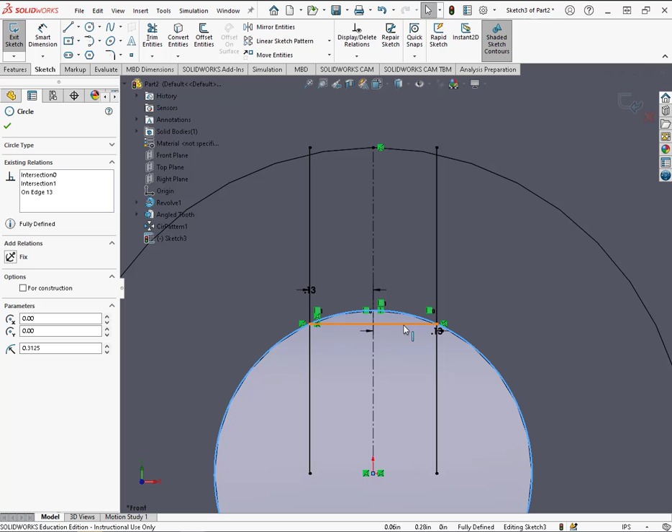Okay, so the only option there would be fix, which we don't want, and intersection. We will hardly ever use the fix. So now I can see that it does have an intersection relation. Now that I have that fully constrained, I'm going to offset this up that 0.125 so I can make my keyway. So we're going to go back to Offset Entities.

I guess I had my circle highlighted, but I do not want my circle highlighted. So I'm just going to make sure that I don't have anything highlighted. I'm going in here to offset. Again, it has my circle. I just unclicked it. I want this line. I want to offset this line, but I only want to go upward. I don't need this line. So I clicked on my line. I want this direction. I'm going to uncheck bidirectional. I don't want this one on bottom, but I do want it on top, so I'm going to select reverse to make it the top line.

So I chose this line that I just made and put the relations on. I want to offset up from there. So you may have to hit reverse, you may not have to. So the only thing that you should have on here is add dimension, possibly reverse, and select chain doesn't matter because it's only one entity. And then our distance is going to be 0.125. So we can check that off. And now I have what I need.

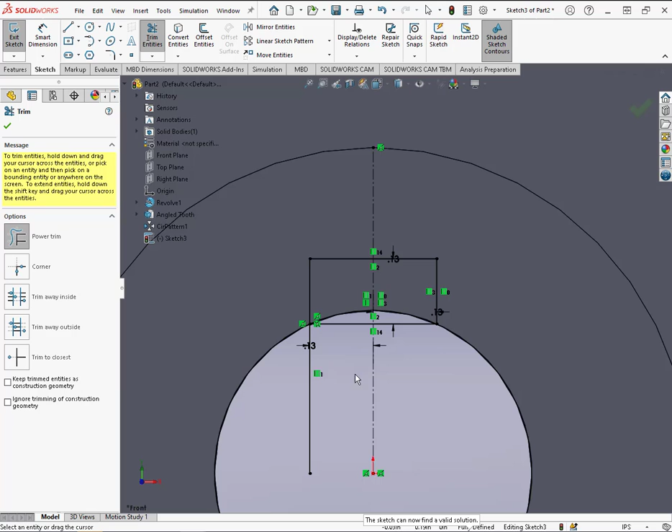I just need to trim up. So I'm going to come in here to trim. I'm going to trim the top of this. It's telling me I'm fully defined, but let's keep trimming and see what it does. So it allowed me to be right there. I'm over defined, but if we keep trimming, so I ended up trimming this circle out, and it was okay for me. Okay, so I had to trim the circle because we didn't need it, and I trimmed the other lines that were sticking out. So we should be good there. And we are fully defined. So I'm going to check out of trim, check off of the sketch.

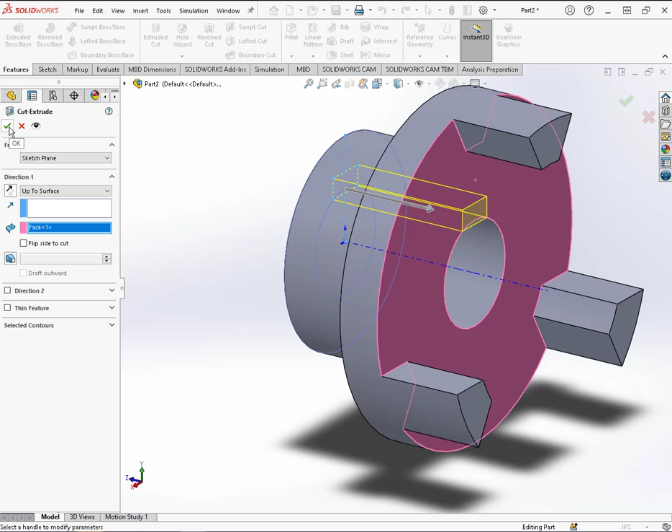And this is going to go all the way through to this surface. So when we do the extrude cut, we're going to click on extrude cut. We're going to go all the way through. Instead of saying blind right here, we're going to say up to surface, and we're going to check this surface and check that off. Yep, so if I go back in here and look at that, my surface that I chose is this back side, and I'm going to check that off.

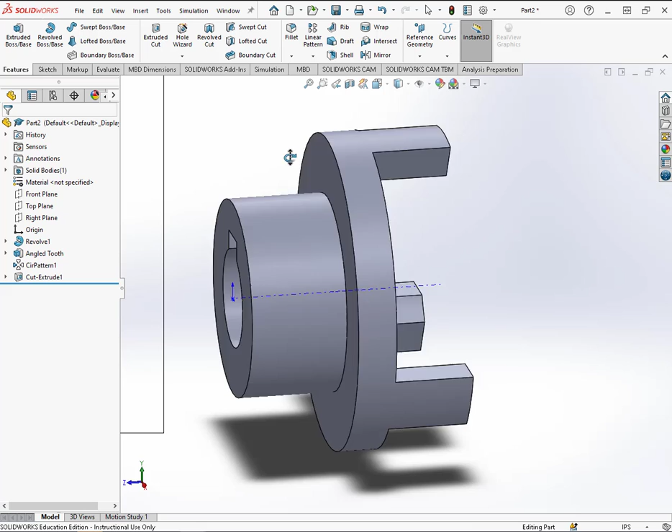Nope, I just showed you that. So I'm going to choose up to surface, and I click on that back face because that's the surface that I want to go through to. The reason why we don't just say through all is because all of it goes out to here. So if there was some other kind of geometry that we needed to add, going through all would go through other geometry possibly, and we don't want that to happen. We want it to stop right here.

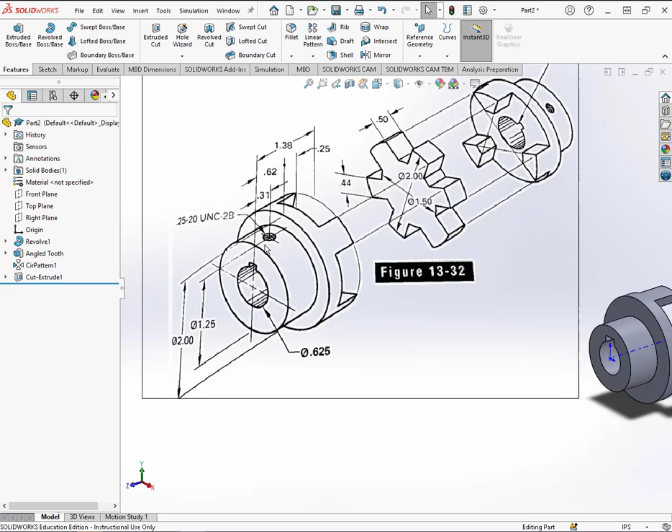Okay, then the last thing that we want to add is that little set screw hole. And when we're doing that set screw hole, we need to have a place for it to start. We cannot start a hole on a cylindrical object in SolidWorks. So we're going to have to choose our plane here, the top plane, to create that hole on.

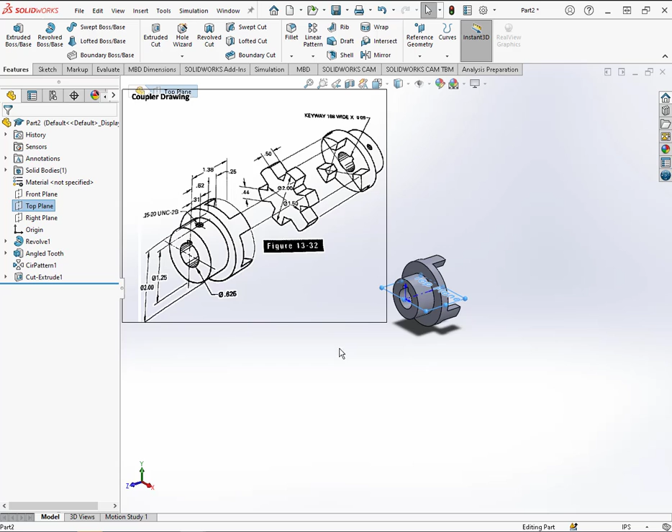And then we can create it with the hole wizard and put what we need here, the 1/4 inch thread, 20 threads per inch, Unified National Coarse, internal thread. Okay, so the next step would be to choose the top plane. And our design intent was to keep everything symmetrical, so we still are symmetrical. Okay, the distance to the center of that hole is 0.31, and we're just lined up with the origin there. So we have 2 location dimensions.

So we're going to go to the hole wizard. And the hole type is going to be just a regular hole. So this third one, actually it should be threaded, so let's see. Let's do a straight tap. It's going to be threaded through all, so we won't have an end condition on that one. It's just going to go through all. So instead of saying bottoming tapped hole, we're just going to say tapped hole.

And the size is a 1/4 inch thread, so we're going to choose that 1/4 inch, 20 threads per inch. And then the end condition is going to be up to next. What that allows it to do is just going to go straight through up to where our keyway is. So just to recap, I chose the tapped hole, which is the 4th one here. I chose the type to be tapped hole, 1/4 inch, 20 thread, up to next for the end condition, up to next for the thread because the whole thing is threaded.

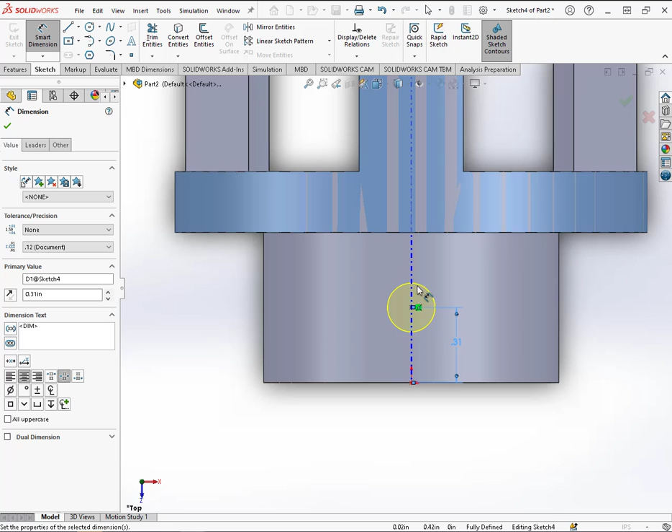So we have fully defined that because our one location dimension is the origin and the other is the distance from the origin. So I'm going to check that off. Check out of the hole wizard. And now I have a hole. So it does not look like it's threaded, but if I hover over it, it does say 1/4 inch, 20 tapped hole. And on my engineering drawing, it will put the thread call out for me. Okay, and it'll also show that it's threaded, and you can actually see that internal thread there with that hidden line. That shows you that it is a threaded hole.

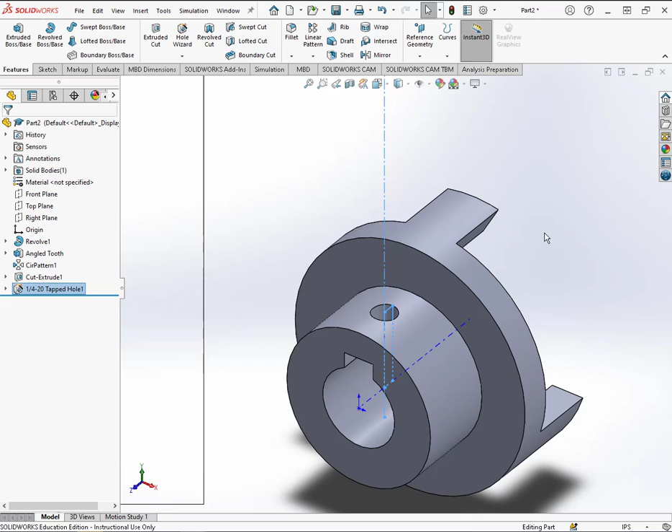All right, so now we are finished with this object. We need to go ahead and save. So we're going to save it as coupler part 2. So we're going to go to File, Save As, and save it as coupler part 2. And remember, we only need 2 parts because the back coupler and the front coupler are the same. We're just going to insert those twice in our assembly. So for now, we completed the spacer, we completed the coupler, and when we come back, we're going to do the assembly.